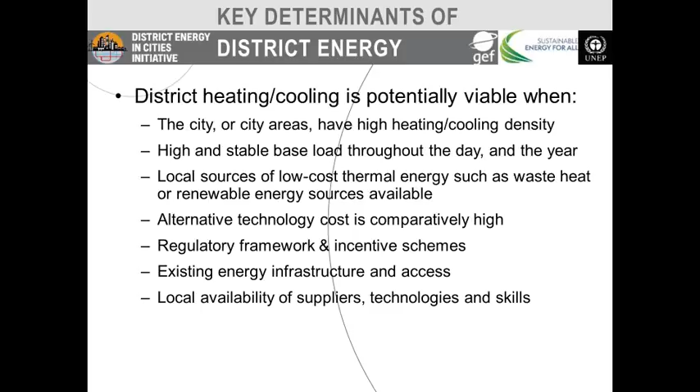So really creating a process that from the beginning brings in the different stakeholders that can play a role, not just the municipal departments, the energy utilities, but also stakeholders like the developers, like housing associations for the end consumers, and so on. These can help in identifying opportunities and develop a business model for district energy.

Of course, the energy master plan can then consolidate this integration, and it will then inform, hopefully, the land use planning and policy, the land use policy and regulation that will then trickle down to the permitting and licensing processes of new developments and redevelopments, and also energy infrastructure.

So with this, we really have a big opportunity to really optimize energy and infrastructure investments and future-proof the energy system, increase load certainty and reduce risks, increase investor confidence, and overall enhance district energy viability.

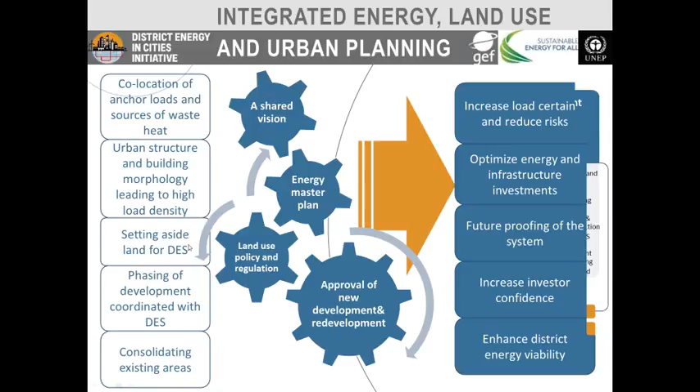All throughout this process and the different phases, there are different tools that can support us, and today we'll be looking at several of these. So, for example, we will take a look at a tool that can support in guidance and capacity building.

I would now present that, but I'm going to do a quick change and hand over to Nico Tillie because he's pressed for time and will not be able to stay with us throughout the entire session. Nico is the chair of landscape architecture with the Department of Urbanism of the Delft University of Technology, and he will share with us some of the tools and exercises that have been done regarding energy mapping. Nico, the floor is yours.

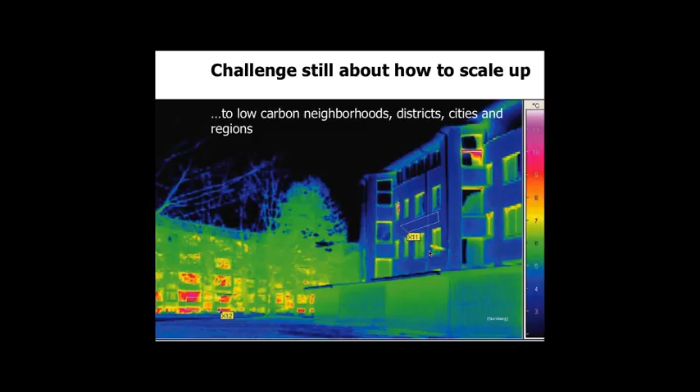There it is. So from a list of solutions, we said, let's go to a spatial inclusive strategy for an energy transition and also for improving quality of life of the citizens. And from that vision to a tailor-made plan in our neighborhoods. Since the 1980s and 90s, we knew a lot about energy and buildings. Energy positive buildings have been around since the 1990s. But how to scale up to neighborhood, district and city level?

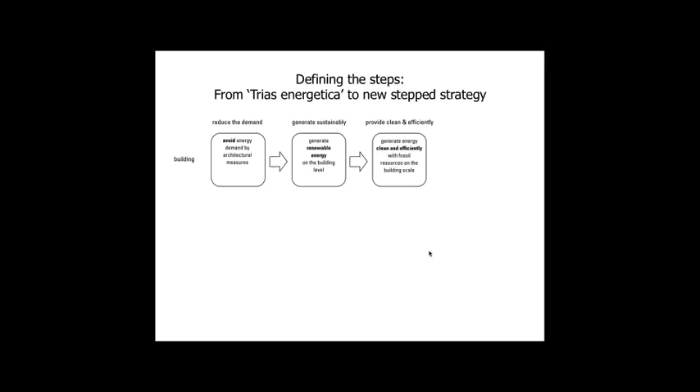And of course, there is the Trias Energetica, which says at building level, reduce energy demand. Energy not used is the best to save. Then if energy is needed, generate it sustainably with renewables, and then provide clean, efficient fossil fuel energy. But looking at energy positive buildings, we noticed one important step was not named, which is now the second step: utilizing waste flows. So we have reduction of demand, utilizing waste flows, generating sustainably, and then we can cross out the fossil energy demand.

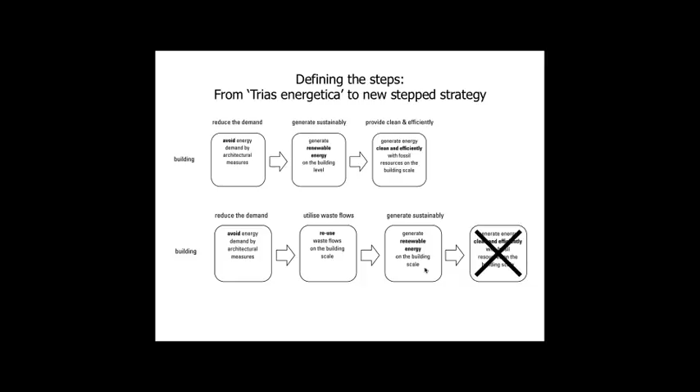So the first step would be looking at neighborhood level energy per CO2 and CO2 per housing typology, mapping what each house is using in the neighborhoods. Then we knew what reduction potentials there would be and what quick wins we could have in all buildings. This is all done in GIS mapping.

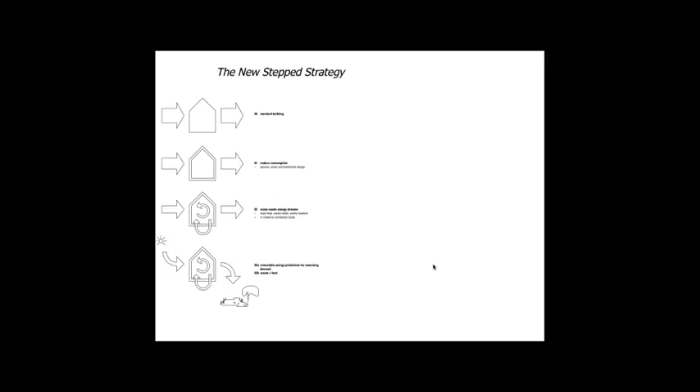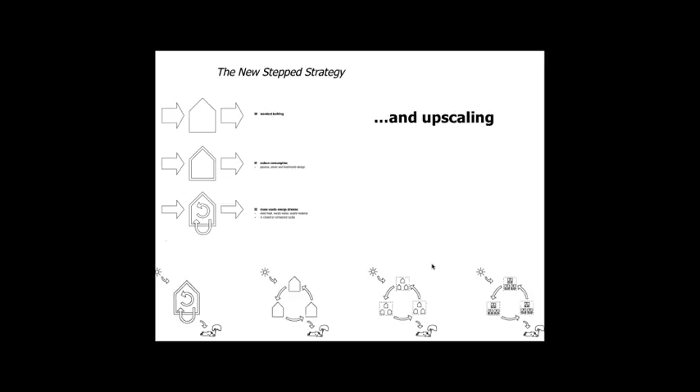But with this new stepped strategy, the Trias Energetica with the exchange of waste flows, we thought, if we can do that for one building, why not scale it up to more buildings, districts and neighborhoods, so that we can exchange energy between buildings and between neighborhoods. This is how the Rotterdam energy approach came into place. We linked these three steps of reduction of demand, reuse of waste flows, and production of sustainable energy from building to neighborhood to district and city level.

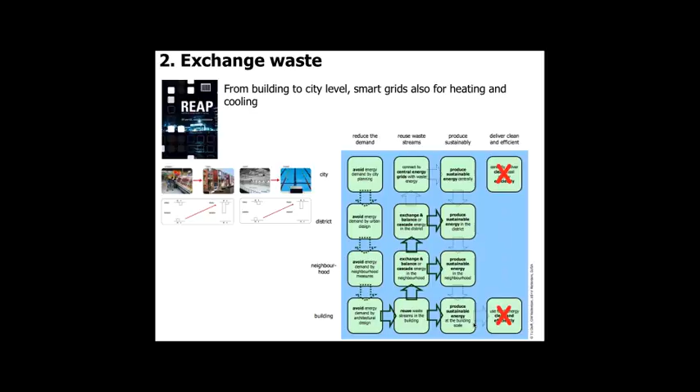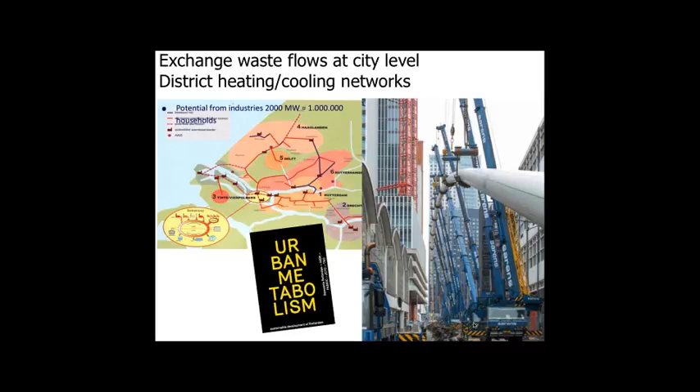For instance, exchanging heat between an ice skating rink and a swimming pool, but also a supermarket, which has a 1:7 ratio with apartment buildings, or a greenhouse on top of your roof, a 1:4 ratio. So we looked at these heat exchange ratios between buildings and then tried to scale up. The next level is scaling up at district or even city level. So this is a master plan of the city of Rotterdam where district heating is laid out and actually implemented.

And so peeling off these different steps, which is again reduction of demand, exchange of waste flows, the third step would be renewable energy. And for us it was extremely important to link this spatial planning to the energy planning part. For instance, here we have a neighborhood in the province of Groningen where 3,000 new dwellings were being built. We have the electricity demand at 10.5 gigawatt hour electricity and the heating demand ready.

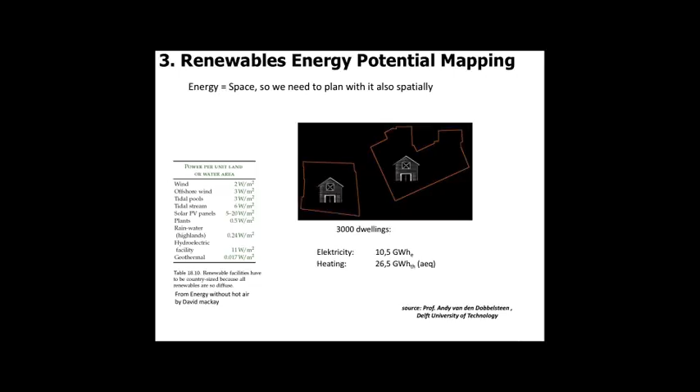And of course, renewables ask a certain amount of square meters. So let's say here on the left of this David MacKay graph, you can see how much watt per square meter can be gathered, and that was important information. And with this information we could also make maps, for instance how much sun we can harvest, and we see also the gigawatt hours electricity and thermal we can get from roofs with thermal, geothermal or PV panels.

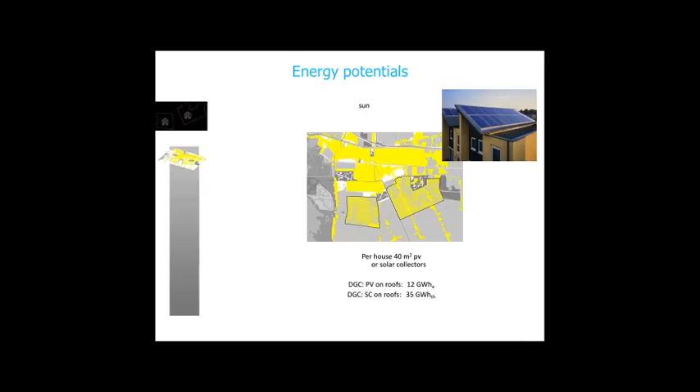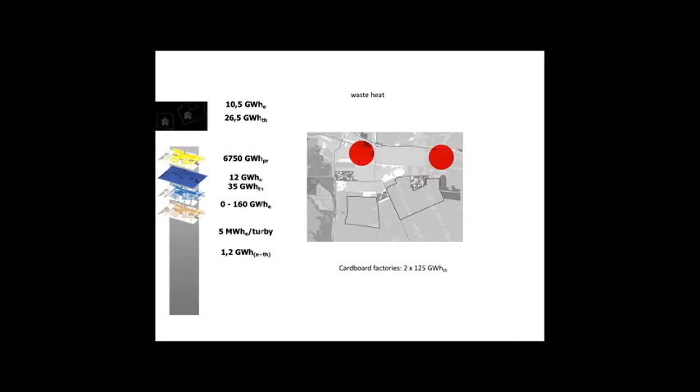The same we did for wind at 100 meters, wind at 30 meters, energy from waste. So each time waste heat, is there a paper mill, like in this case a cardboard factory, etc. So each time we came up with the figures connected to it. Biomass, for instance chicken manure over here, maintenance of parks, so the biomass from parks, nature and woodland areas.

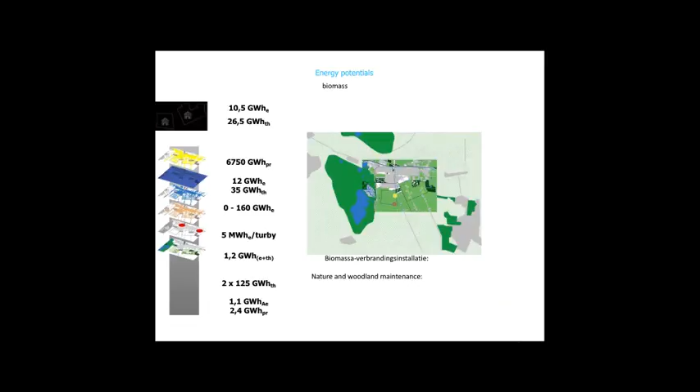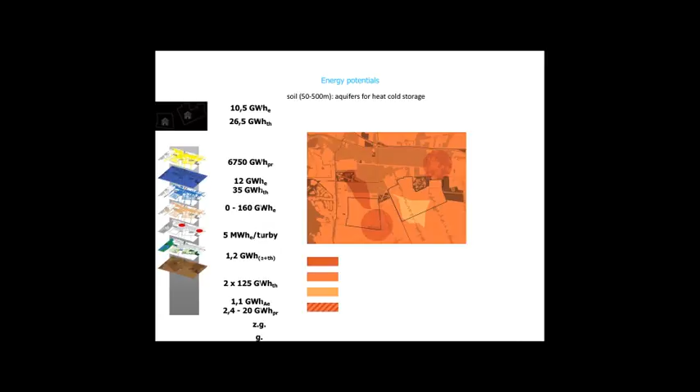But then from sun going down to the soil, we go now into the soil. What is the potential of heat exchangers from 0 to 50 meters? What is the potential of aquifers for heat-cold storage? And finally, what is the potential for geothermal energy? If geothermal energy runs out after 25 years, these wells get colder and colder, and they need 75 years to heat up again. You can also heat them up faster by inserting hot water, so they can act as a storage.

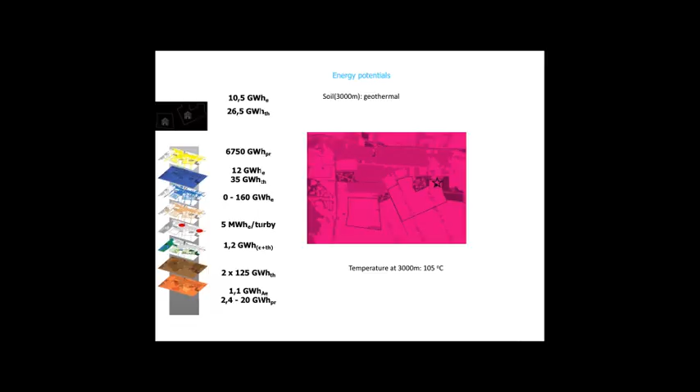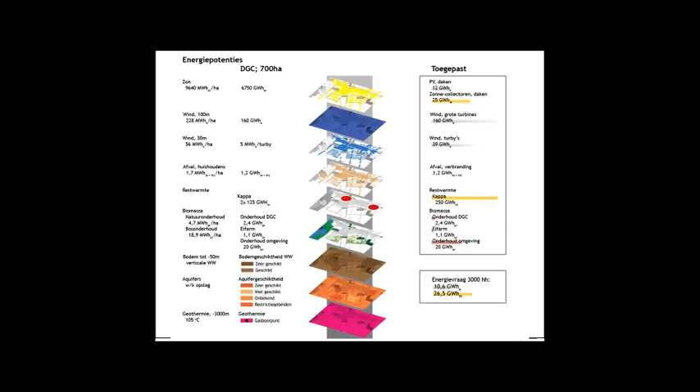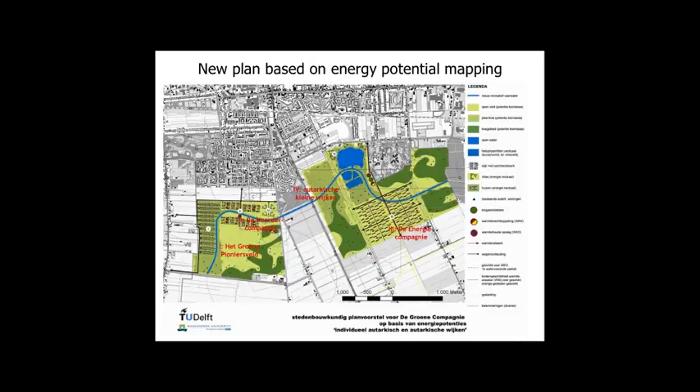So with this, we have this whole stack of information, which the urban planner can then use. Let's go back. So we have a whole stack of information here, and just by providing this information to the urban planner or landscape architect or whichever interdisciplinary team is working on this, gives them insight of how to plan neighborhoods, but also existing areas in the city. So just by having this information, 70% of energy efficiency was realized.

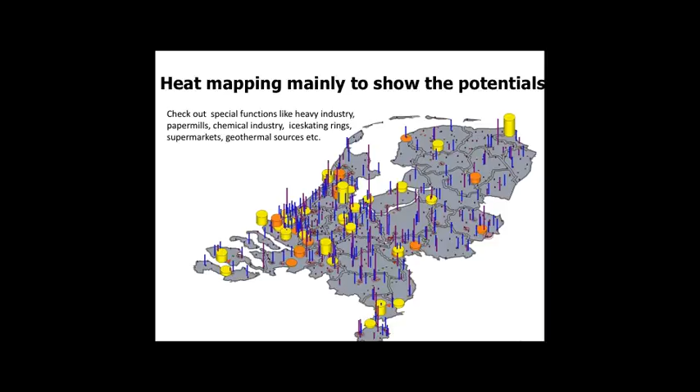And of course there are more types of maps around, like this is a heat mapping for the whole of the Netherlands, where we looked at paper mills, chemical industry, ice skating rinks, supermarkets, geothermal sources, you name it. This is for a whole country. Here we zoomed in more on the Rotterdam region, as there's a high industrial cluster, and here we zoomed in really on the city of Rotterdam, with the hollow cores being the demand and the filled up cores the different sources, how we can actually fill this in.

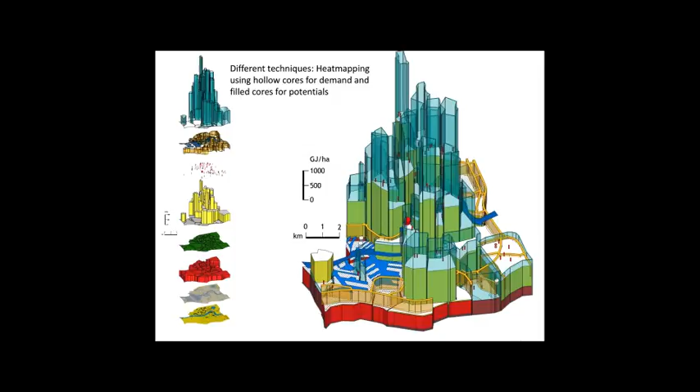So this is how we looked at this mapping, and this is near the city of Delft, where we also mapped the greenhouses, but also the supermarkets. And for instance, in this example, you see that a greenhouse collects a lot of energy, but also has a geothermal source for heating up the greenhouses, for producing carbon neutral tomatoes, but at the same time heating a swimming pool plus a neighboring school all year round. And those are very interesting combinations, especially if you look at city level.

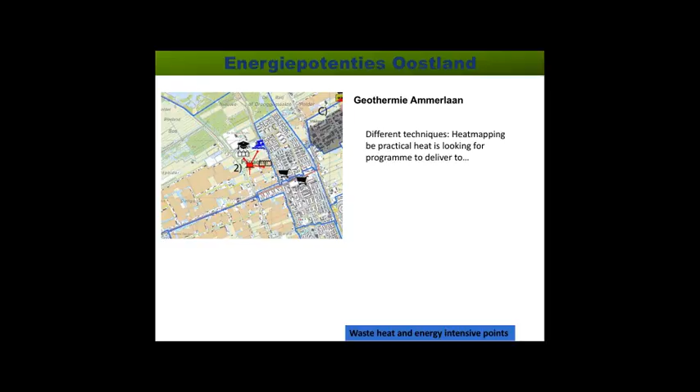And this study was actually paid for by a bank who was interested in the continuation of these greenhouses, because they were doing less well than previously, because they had too high energy bills. So this is an interesting approach of who can finance these kinds of things. Here's just another example of a heat exchange map at regional level. For instance, here the whole region of Rotterdam.

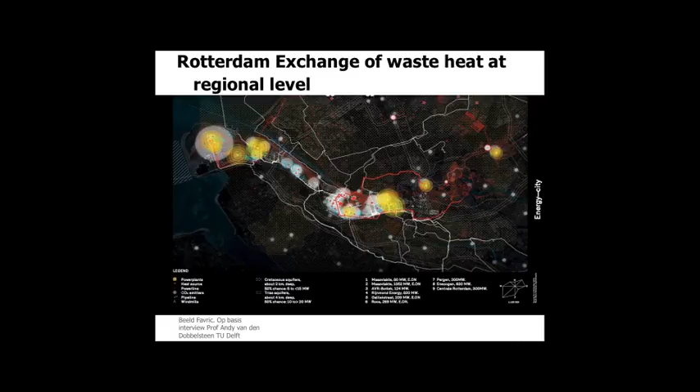And one example here was that we brought this to make a whole ring of new district heating at regional level. So Rotterdam, The Hague, Delft, and a few other cities where geothermal heat wells could actually also be used to fill up and add hot water to this district heating network. So we had a multiple source approach, because in future the garbage we now incinerate will be less, so we need different sources to heat the district heating network.

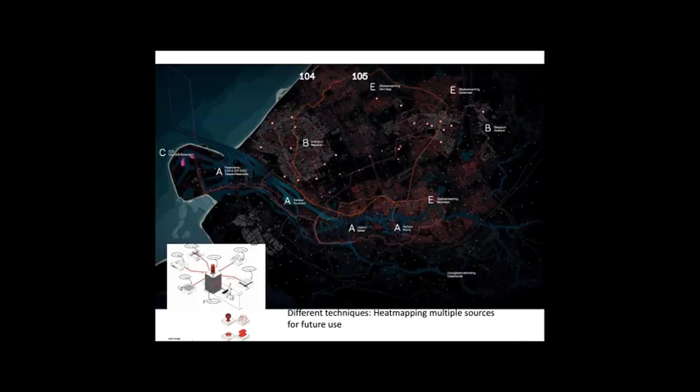So the fourth step in this, remember I had three steps so far, so the fourth step would be how can we feed this information of reduction of demand, exchange of waste flows, and renewables?

How can we feed this information into a scenario tool? And there are many tools around. We use the GRIP scenario tool by Sebastian Carney, which was developed in 2007, to actually make a scenario plan for the city of Rotterdam in 2030 and for 2050.

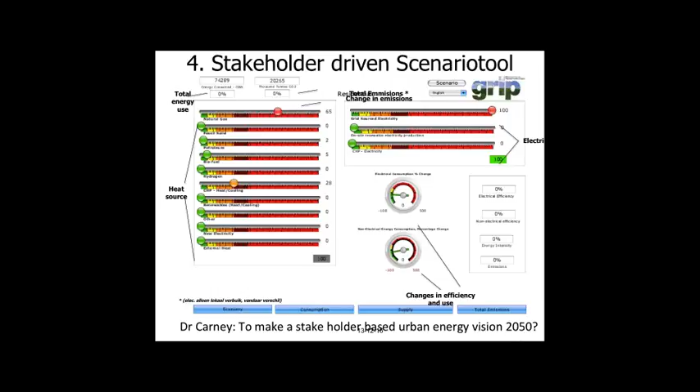And with the stakeholders, we looked at what is the energy mix now and what is the energy mix in future. I won't go into detail of that too much, but this actually gave us the basis to make with GIS maps the optimal district heating locations at the city of Rotterdam. So here, for instance, we have the city of Rotterdam.

We linked it to how many dwellings are in the cities, how many district heatings are already connected, where will the new buildings be, where are the hospitals, where is demand, and where is it possible to put pipelines, and where is it for the energy companies worthwhile to invest in.

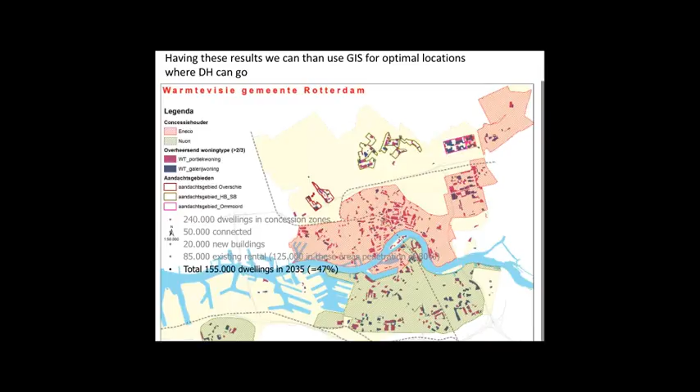So this has led us to this number, and this is what actually was the basis for a new energy plan, where district heating is a big part of, but not only district heating, because some areas will be covered with other sources, but this made it possible for us to make a tailor-made plan for the whole city of Rotterdam. So thank you for your attention, and I hope I could contribute some nice things to you.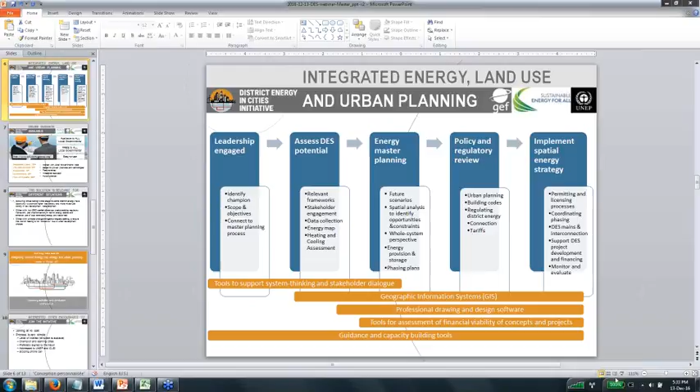The one I would like to tell you about next is a tool that can support local governments regarding capacity building. Oh, and I apologize, I hadn't maximized my slides. Here we go. The tool I would like to tell you about next is called Solutions Gateway. It's an online platform which is available in this URL, and I invite you to load it in your computer.

This has been developed with funding from the European Commission, but it continues even beyond that funding. We continue to make it alive, and currently, thanks to this cooperation platform that the Global District Energy in Cities Initiative offers, we are in a cooperative effort with several partners within the initiative, developing guidance on district heating and district cooling that are now becoming available.

We are finalizing developments. In any case, I'll already be able to share with you some examples. Just before we move on, I would like to highlight a few of the features of the Solutions Gateway and stress that this tool is available to all local governments, and it's free.

And it's easy to use. It provides guidance on different aspects of low emission development. It is aligned with local governments' rules and usual mandates. It is based on proven practices and technologies. The contents are peer-reviewed, and they are developed taking an integrated approach.

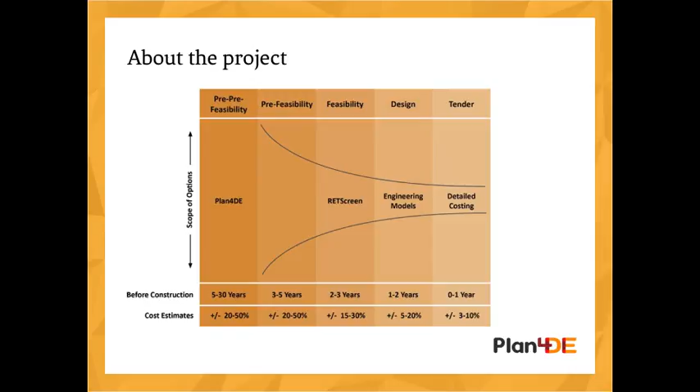And the rationale for this is that we know that the built environment locks in opportunities for district energy or locks them out. And we see this, for example, in a lot of sprawling areas in North America, district energy just isn't feasible because the heat density is too dispersed. Whereas in much more dense areas, it is much more feasible. So the land use patterns heavily influence the built form, which then determines the energy profile of an urban area, which ultimately influences the emissions.

And the organization that has the most levers over land use and built form is local government. And within the local government, it's planners who really have a significant but not the only influence over built form or land use. And so that's the primary target audience for Plan4DE. It's something that is accessible to planners that they can use to explore the implications of different patterns of land use for district energy.

The way it works is that it compares a district energy case versus a business as usual case. And the business as usual case is individual heating in each building, which is, in North America at least, the default in many places. So it's looking at the total cost, the life cycle cost, as well as the full cost, because we also look at the cost of other pollutants and the price of carbon and so forth of those two options.

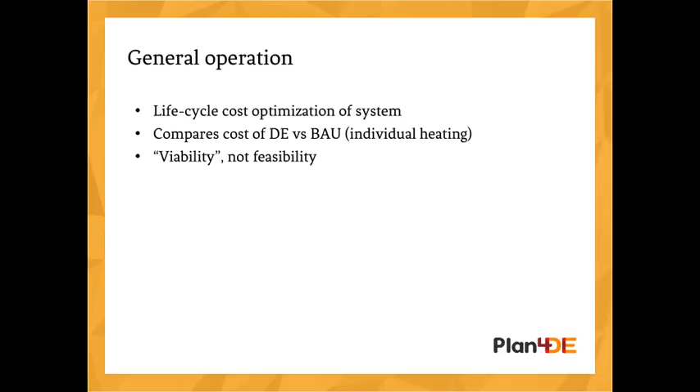So we consider that viability, and it's more of a social lens than a kind of a market lens. The way in which we do this is the planner or the user inputs a number of parameters around the built environment. So floor space, energy use intensity, district area, and the user can define archetypes of buildings or use archetypes contained within the model, and those in turn determine the load of the buildings in that district, as well as the energy consumption, energy use intensity, heat density, and so forth.

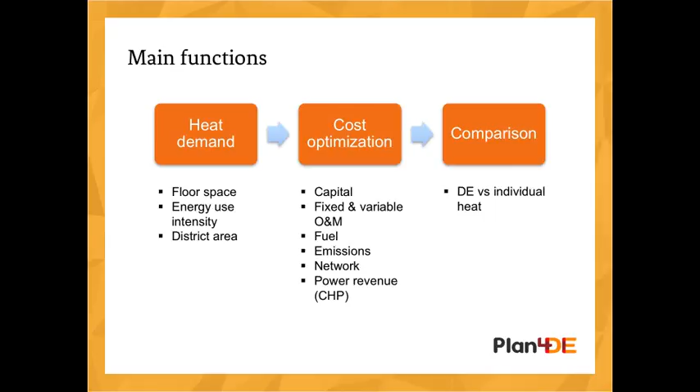Once those parameters have been determined, the model then optimizes a district energy system, looks for the most cost-effective combination of technologies. And it uses a number of parameters around capital costs, operations, fuel costs, carbon price, network costs, and power revenue to identify what the optimal district energy system would look like. And the user can also either include or exclude certain technologies or fuels, depending on the particular context. And then it simply compares the district energy option versus the individual option for that particular piece of the built environment. And you end up with this kind of chart.

You have a curve. The black curve represents the cost of district energy, which varies according to heat density. As the heat density increases, the cost of the district energy system decreases. And then the blue line represents the cost of individual heating systems. And so the goal of the planner is to ensure that that yellow line is in the green area where district energy is lower cost than individual heating systems. And the inverse is where individual heating systems are cheaper than district energy, and that's the little red triangle.

The interesting thing about the model is that for every particular built environment configuration that is developed by the user, this curve changes because the mix of technologies and the size of the district energy system will change. So it's a bit of a moving target once you start adjusting the parameters, which makes it a lot more complicated than it might appear on the surface.

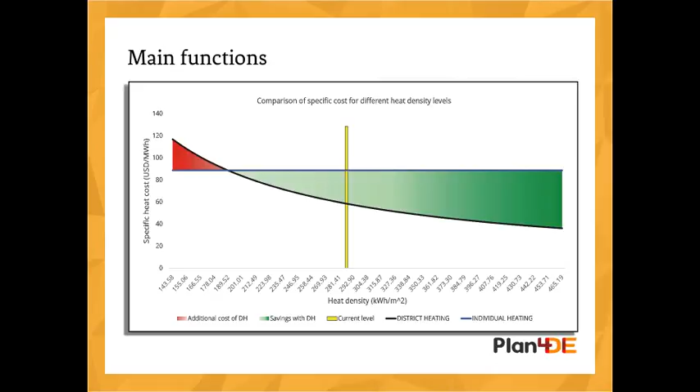There's a number of other additional features or functions within the model. You can explore, as I mentioned, all sorts of different district energy technology mixes. You can add or subtract revenue generation depending on whether it's combined heat and power. It has an algorithm which will generate network length and optimal location of a district energy plant for a particular district. Or you can also use GIS to identify the network length that makes sense in a particular district given other constraints.

You can adjust all sorts of other variables such as system lifetime, the heating assumptions, so what mix of heating actually is occurring or could occur in particular buildings. You can incorporate waste heat from other sources and also supply industrial heat demand. And you can look at different currencies. So the data sets within the model right now, there's cost curves for European price assumptions and North American, and it's relatively easy to add prices for any other jurisdiction.

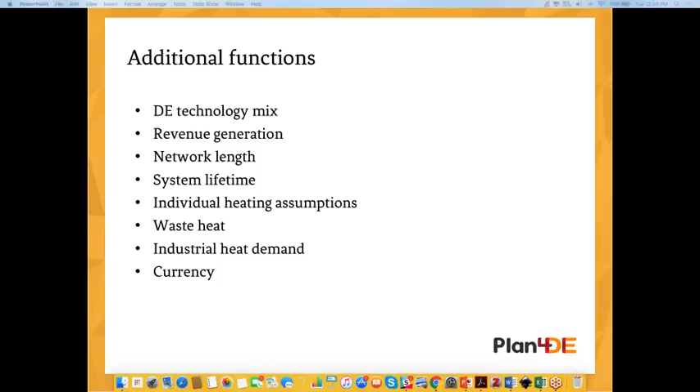Just close that. So we have three different versions of Plan4DE. We have a basic version, an intermediate version, and an advanced version. And the basic version is like a really easy version to play with. And the advanced version is a completely open version of the model where every assumption and parameter can be adjusted.

So in terms of applications, you can use it to evaluate development plans, explore alternative development scenarios, scan for district energy potential in existing neighborhoods. So you can use it within existing neighborhoods in addition to looking at the future. And then we think there's all sorts of other applications which we have yet to identify.

So this was a really interesting finding in that the planners or developers of a potential district energy system would need to plan for a period in which district energy wasn't feasible, knowing that it would ultimately be. So they'd need to be able to scale the system in a way that made sense. And the model can provide a lot of guidance as to how that can work and also how the planners can support that development process.

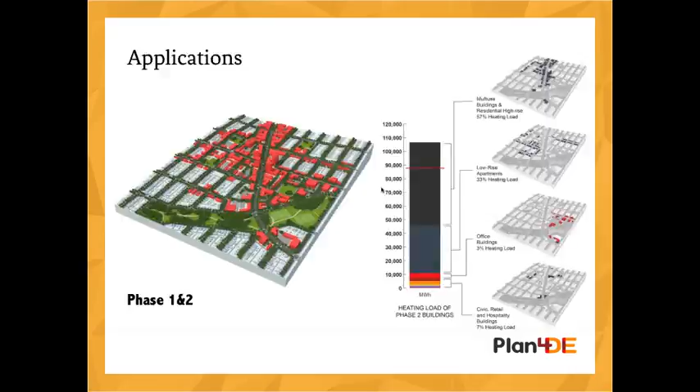So that's a quick overview of Plan4DE.

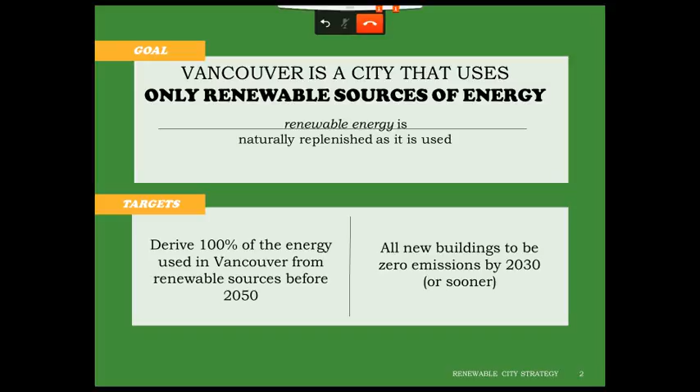Okay, so I'm just going to give a bit of an update on the city's what we call renewable city strategy, what we're doing with buildings citywide, and how neighborhood energy or district energy fits in with that. So just over a year ago, just before the Paris event, COP21, our city council approved the Vancouver Renewable City Strategy, which strives to get the city of Vancouver to 100% renewable energy before 2050. And within that, one of our key targets is for all new buildings to be zero emissions by 2030.

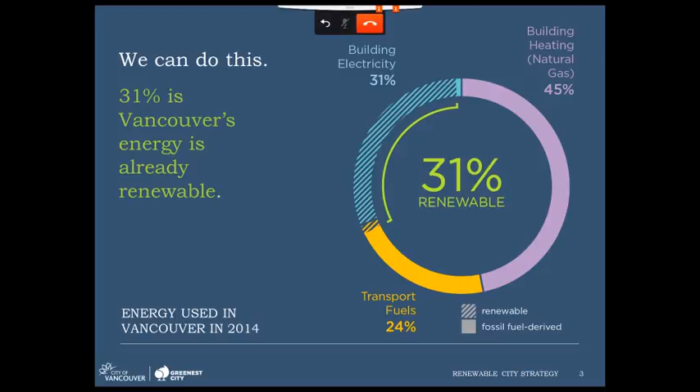So this slide shows where we're at today. About 31% of energy in the city right now is already renewable. That's predominantly electricity from hydroelectric power sources, and then we've got a lot of work to do on our transportation fuels, and the biggest source of emissions right now is the heating of buildings, so use of natural gas to heat buildings.

So further to the city council's approval of the renewable city strategy, in July of this year they approved what we call the zero emissions new building plan. And that zero emissions building plan really lays out the roadmap for how we're going to get to zero emissions with our building stock, and sets the target that we're going to get there for new buildings by 2030 or earlier. This slide shows how GHG emissions have declined in our building stock over recent years. We're at about 14 kilograms per square meter of floor area in a typical new residential building.

And looking ahead to 2020, 2025, and 2030, roughly every 5 years or so, we're making a change to our zoning policy and building code to further reduce greenhouse gas emissions. And the reason why we need to do it in an incremental way is so that we're not impacting the affordability of housing in the city. Affordability of housing right now is a huge issue for us.

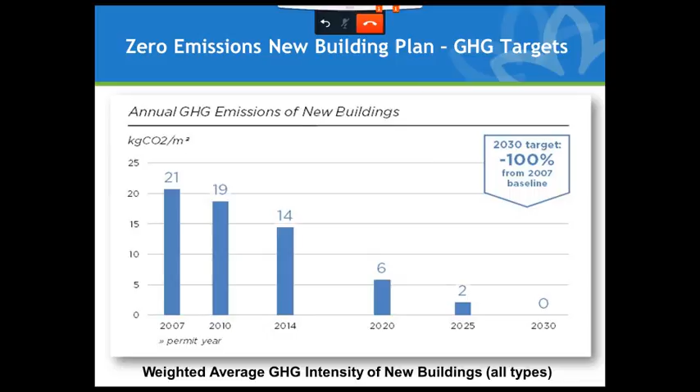So we have 4 key strategies under the zero emissions building plan, the first of which is strict limits on greenhouse gas emissions and thermal energy demand. In past years, we were relying on building codes that reference ASHRAE. Unfortunately, the key measure with that isn't greenhouse gas emissions, it's energy efficiency expressed in dollars. And that doesn't work very well in a place where natural gas is practically free. So we're moving towards strict limits on end-use energy intensities and GHG emissions.

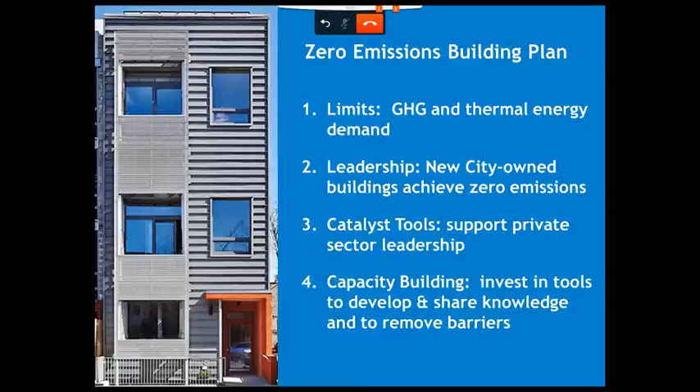We are taking leadership on new city-owned buildings, so new community centers and civic facilities will be getting to zero emissions much sooner. Actually, all new buildings like that beginning in 2017 will need to be zero emissions. Then we have other tools like catalyst tools to incentivize private sector leadership, and capacity building to help get knowledge and information out into industry and to reduce some of the barriers to building green.

So we have 2 key pathways to achieving zero emissions for new buildings. The first, which is extremely important, is to reduce consumption, so build much more efficient buildings than we have in the past with better envelopes and ventilation systems. And secondly, we need to increase the supply of renewable energies to the heating sector and connect those buildings that we can to a neighborhood renewable energy system where it's available.

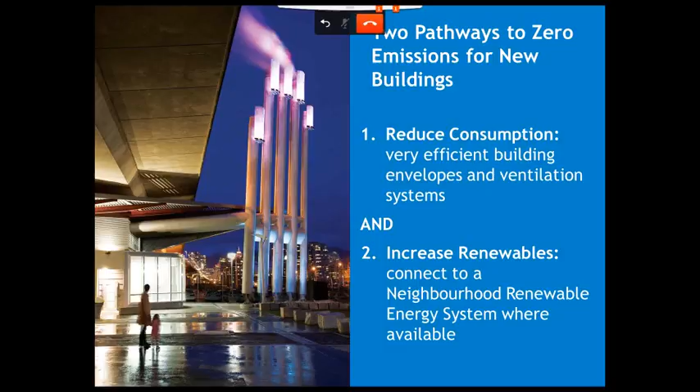I'm going to step back in time a little bit and do a case study on our Southeast False Creek neighborhood. The Southeast False Creek neighborhood is on the edge of downtown Vancouver, and our city council decided in the early 2000s that we're going to try some new things in this neighborhood to push the envelope on sustainability and to help inform our plans and policies for other areas of the city. So this neighborhood is an 80-acre brownfield site with a history of 120 years of industrial use.

Forecast to have 6 million square feet and 16,000 new residents by 2020. And the community is totally designed on environmental, social, and economic sustainability principles. One of the key performance requirements of this neighborhood is to get to as close to zero carbon as possible. And we evaluated early on in the planning process a range of options to get there.

And we quickly learned that if we were going to be just focusing on buildings themselves, that we wouldn't be able to get there in a cost-effective manner. Doing one-off geo-exchange or other high-performance heating systems can get very, very expensive at a neighborhood scale, and also difficult to secure that performance over the long term because you don't have control over the buildings in the long term. So through the planning process there, it was determined that a low-carbon district energy system would be the best approach to getting low greenhouse gas emissions in the most cost-effective manner.

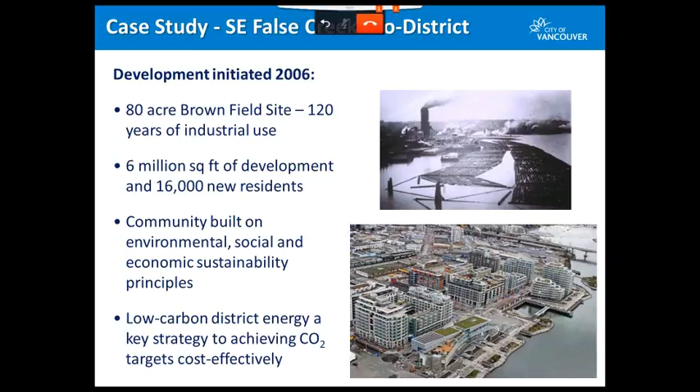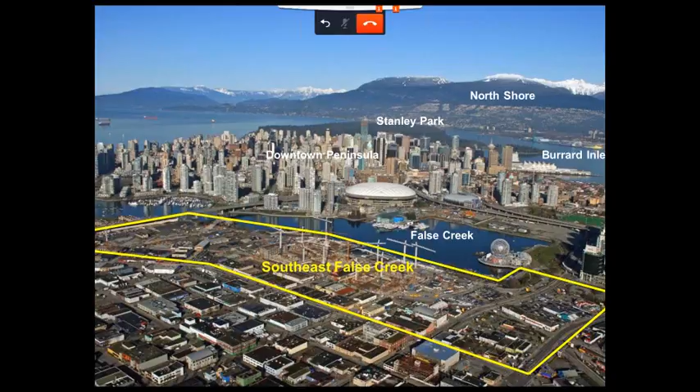This slide just helps orient, if you're familiar with Vancouver, it shows where the neighborhood is. And this photo was taken just in the early stages of construction of the Olympic Village back in 2008. The energy utility has been operational now since 2010. It eliminates more than 60% of the greenhouse gas emissions associated with heating of buildings, and that's compared to electricity from hydroelectric, a blend of that and natural gas.

And our primary low carbon energy source is waste heat recovery from the sewage system. And then in addition to that, we're also taking a small amount of heat from solar thermal collectors on rooftops of buildings. The customer base for the system has been growing quite rapidly. When we first established it, it was just over 1 million square feet, and now we're at about 4.5 million square feet of buildings connected to it. These are all new developments with the exception of one existing gas-heated building that decided to eliminate its boilers during a renovation and connect to us instead.

It's a financially self-supporting utility, so all the costs associated with building and operating, financing, et cetera, are recovered through our user rates. And those user rates are competitive with traditional forms of heating. And like I said earlier, Vancouver and the province that we're in has some of the cheapest electricity and gas anywhere in the world.

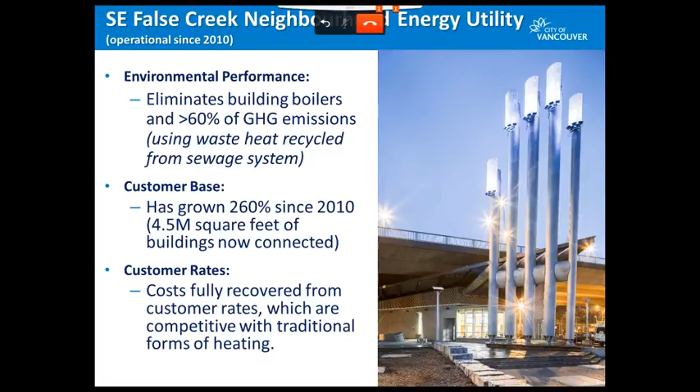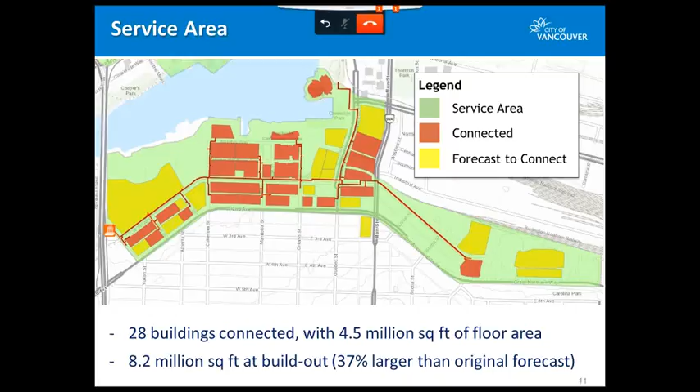This map shows the service area. We have 28 large buildings connected to it. When we initially had our business plan approved to build the system, we were looking at a total build of a customer base of about 6 million square feet. We're now forecasting more than 8, and that's a very conservative forecast. It's likely that's going to go well above 10. And this past year, we've expanded the system to an adjacent neighborhood where we have a new arts university being constructed there.

So the business model for the system, it is owned by the City of Vancouver and operated by the city. It's operated within our Engineering Public Works Department. And one thing that we've done here organizationally to help drive the project is we have what we call a steering committee with key representatives of different departments, and that really helps align the staff in the different departments and avoid the situation where you often get in governments where you have silos, different departments not working well together.

Our city council makes all the major decisions on the system, from capital investments, policy, and customer rates. And we've also established a third-party independent expert panel which reviews and validates any changes to customer rates or related policy before we take it to council. And the utility is financially self-supporting, and it's also operated on a commercial basis as well. So we're operating it with the same ROI that a private sector utility would be receiving.

And we did that for a couple of reasons. One, to demonstrate to industry that it's possible, that there's a business opportunity here, and to attract private sector capital and other systems. And also, if one day we decide we want to divest of the utility, we won't have this issue of rate shock being experienced by customers when we switch from city ownership to private ownership, if that happens.

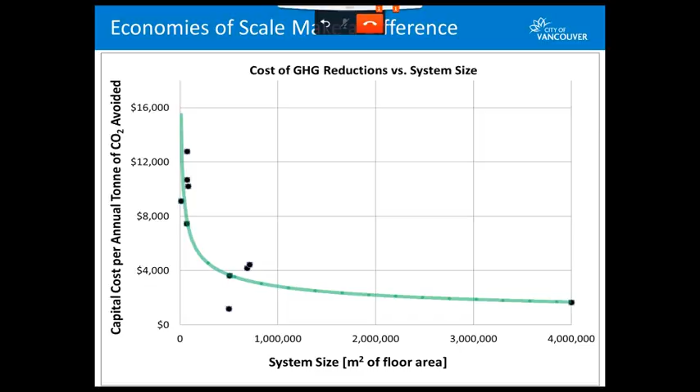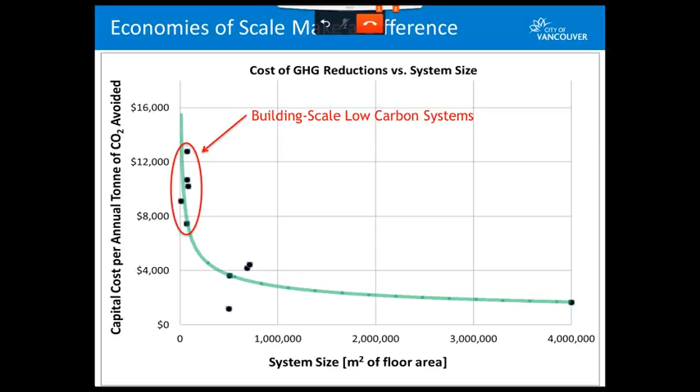So this first collection of plots on the axis, those are building scale systems. They're mostly geo-exchange and air source heat pump systems. They do get to low carbon, but they have a fairly high cost, roughly $8,000 to $12,000 per annual ton of greenhouse gas emission avoided.

Next, we have a neighborhood scale system, like the Southeast False Creek system and new systems that are being built in Northeast False Creek and River District in the city. In these cases, the capital cost per ton avoided is about half of the individual building. And just to be clear, this isn't applied citywide. These neighborhood scale systems target neighborhoods that have high density development. These are not serving single family houses.

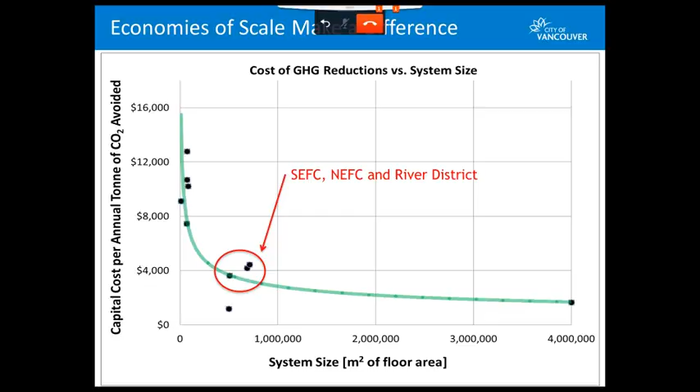And then finally, we have fuel switching for existing steam heat systems. In this case, you don't need to build all new distribution infrastructure. You can just build a new energy center that uses a fuel source like waste wood to reduce the use of natural gas for steam heating.

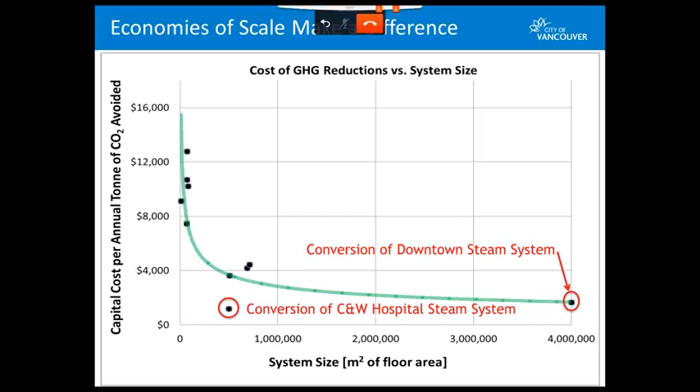So what we've learned through our experience in Southeast False Creek and doing a lot of research looking at other systems is that neighborhood energy systems, in appropriate applications, namely high energy demand intensity applications or high density neighborhoods, can achieve zero emissions without radical changes to current building practices. They also enable zero emissions retrofits for existing gas heated buildings. So you can take a building that's operating today, eliminate its gas boilers and connect to a system and get a radical reduction in its GHG footprint just through connection.

These systems also enable recycling of waste heat and much better resource management at a local level, and give us long-term flexibility to achieve GHG emission reductions in the future on buildings that are built today. In Southeast False Creek, for example, the buildings that are getting heat from that system have a GHG emissions intensity of 6 kilograms per meter squared, which is about a third of buildings in other locations of the city. Over time, we can make changes to the central plant, adding new sources of heat, thermal energy storage, etc. We can drive that 6 down to 0 in the future for a building built today.

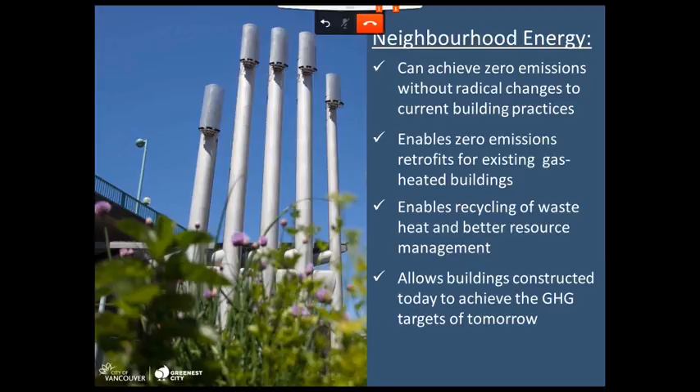For a building that doesn't have any system connected to it or any future opportunity to connect, it's very, very difficult to retrofit those buildings in the long term to get them to zero emissions. So taking our lessons learned from Southeast False Creek and other research, we developed what we call a citywide neighborhood energy strategy. A big part of that was an intensive mapping effort to identify which areas of the city are viable to heat with neighborhood energy systems, the high density areas. And we also identified the different sources of heat that would be available for those systems, much like the Rotterdam example that was provided earlier.

So we have steam heat in the core, and in the long term, that steam will likely be transitioned to hot water. But that's really a long-term priority. It's not as efficient as hot water, but it's not inefficient enough to make the conversion happen right away. We also have a lot of existing gas-heated buildings in the downtown that aren't connected to district energy that we want to connect over time. So district energy is part of our low-carbon retrofit strategy in the downtown.

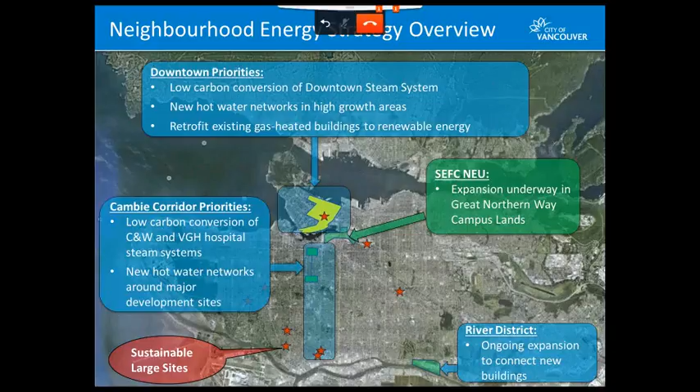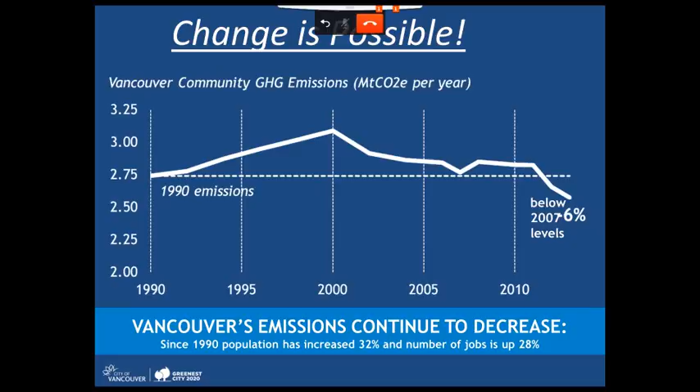It was really wonderful to hear from the leadership of the city of Vancouver regarding district energy and also the transition to a 100% renewable energy future, taking a very comprehensive approach regarding the different sectors, the building sector on the consumption side, the district energy supply. This was indeed a great example.